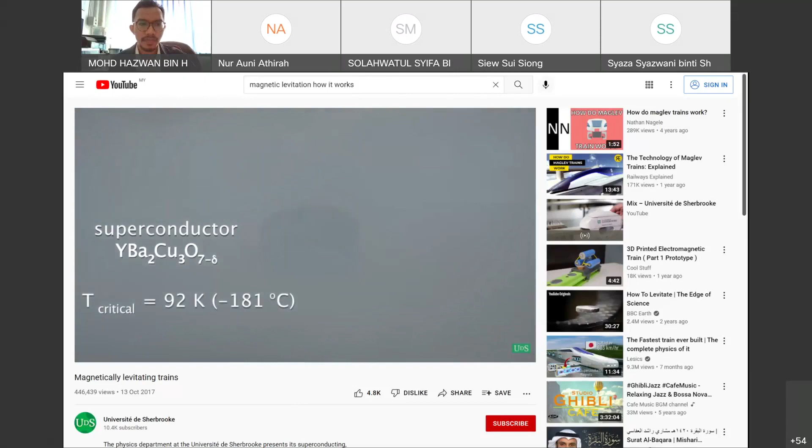Okay, so you can see that this is actually a miniature where you have a superconductor. This type 2 superconductor has been reduced to its critical temperature. So what happens is that when the material is reduced below the critical temperature, it starts to give a levitation effect.

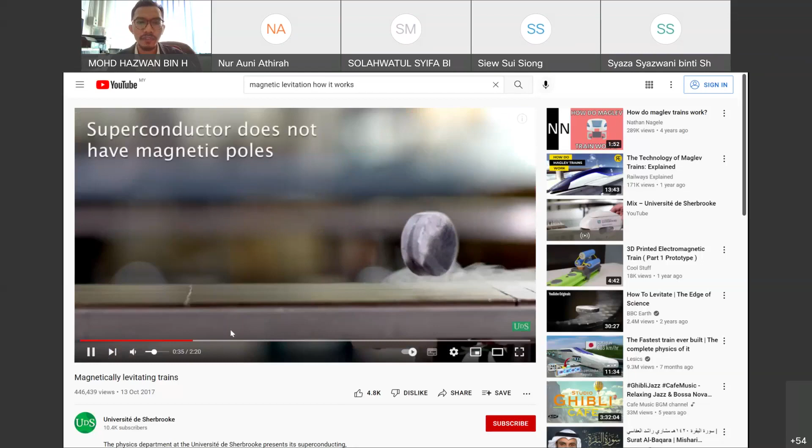And when you have a rail that is made from different poles, north, south, alternating, and with a simple push, you can see that the material can move, and the movement is like frictionless, and it actually gives a very high speed.

So imagine that you have a train and you put superconductors and reduce the temperature by adding liquid nitrogen. What happens is that with a simple push into the alternating magnetic pole line, the train can start to move with a high velocity.

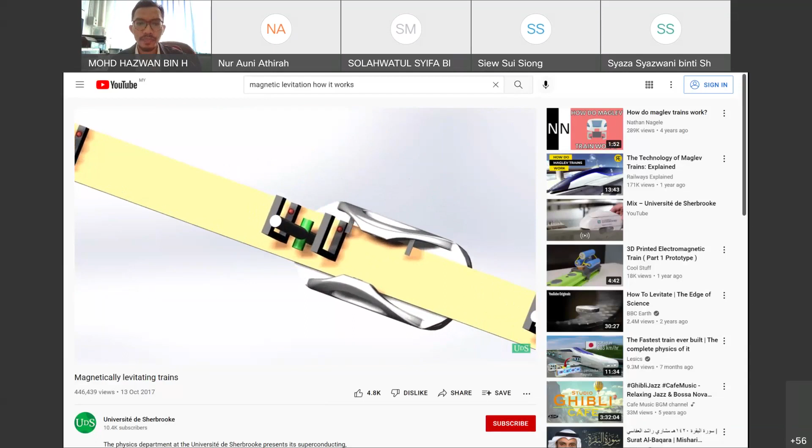Right, so all this technology has been used currently in various applications. I guess maybe you've seen speed trains in Japan, speed trains in China, in Europe, Taiwan, and so on. They are actually using magnetic levitation technology. And with this technology, we can ensure that the speed or velocity of the train could be achieved at a high limit.

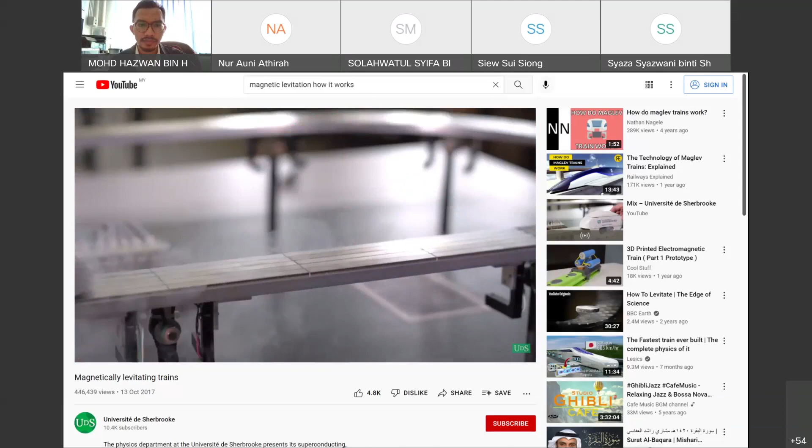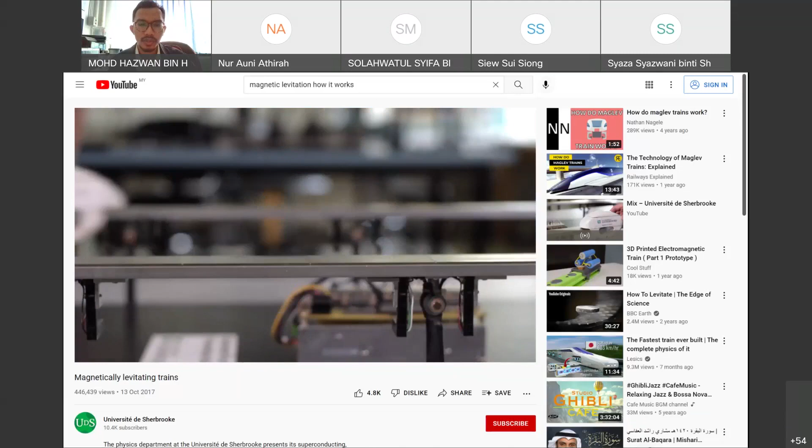So you can control also the velocity, and I think with this you can achieve as high a speed as you want.

All right, so that's all, I guess, for the video. I'm going to share slides for today. You guys find it interesting. I'm sure you will find it interesting when we talk about magnetic levitation. It's always, I guess, looking into the future of train transportation.

Okay, so the thing that you have seen just now is basically a material called superconductors. Superconductivity is actually the disappearance of electrical resistance below a certain temperature. So what happened is that you might see in the video that the researchers are putting liquid nitrogen. The function of the liquid nitrogen is actually to reduce the temperature of the superconductors so that it can achieve a so-called critical temperature.

So critical temperature is actually the temperature below which superconductivity is attained. And what happens is that when you reduce the temperature, the electrical resistance will disappear. So it means that you don't have any friction or any sort of resistance created as in a normal case.

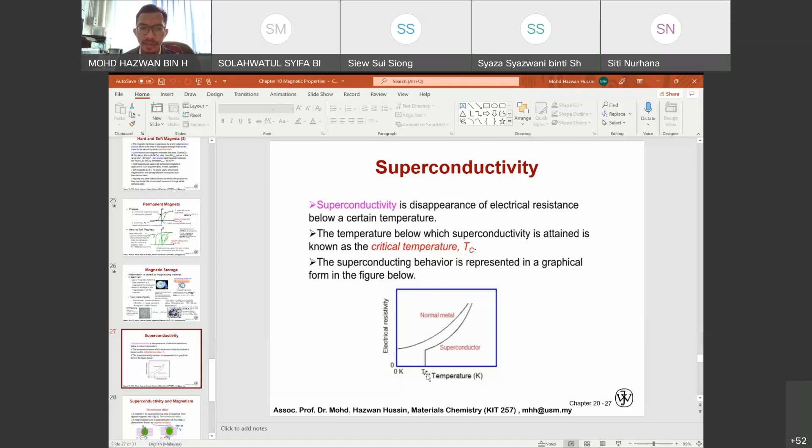So superconducting behavior is represented in the graphical form as below. You can see that as you increase the temperature for a normal metal, the electrical resistivity will increase exponentially. But for superconductors, what happens is that when you increase the temperature up to a limit of the critical temperature, there's no effect on resistivity. So it's going to stay flat, or the same, in the end.

Superconductivity and magnetism. The first one we can relate is the Meissner effect. A material in its superconducting state will expel all of an applied magnetic field. This is called the Meissner effect.

A magnet placed over a superconductor will give a flotation phenomenon known as magnetic levitation. In figure A, if the temperature is higher than the critical temperature, it will be in a normal conducting state and magnetic flux will penetrate. When you put a superconductor with a magnet underneath, you will see an interaction, an attraction.

But when you decrease the temperature of the superconductor by pouring liquid nitrogen, for example, the effect is that the critical temperature is now larger than the normal temperature. Then when you put the magnet underneath it, the superconductor will start to float. It will expel the magnetic field.

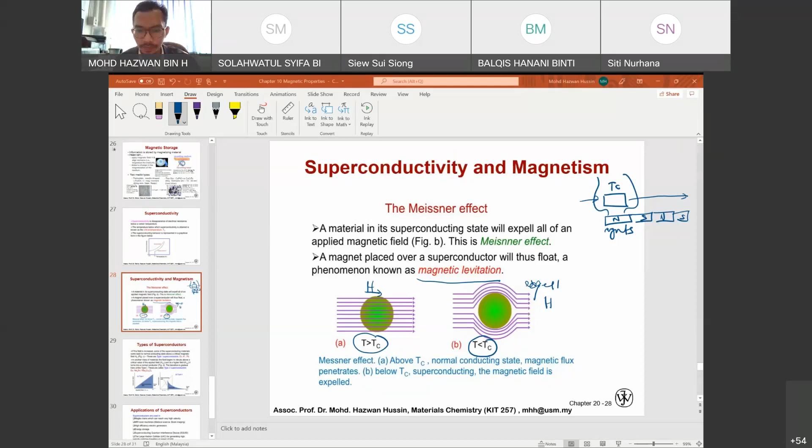Okay, moving on to the next one, we are looking at the different types of superconductors. There are different types of superconductors. For example, here I give examples of type 1 and type 2 superconductors.

Type 1 superconductor means that if the field is increased, some of the superconducting materials come back to a normal conducting state above the critical magnetic field. For type 2, in another class of materials, the field begins to intrude above a critical value of an applied field at the higher field. It turns into a normal conductor, and the transition is gradual, unlike in type 1. This is called superconductor type 2.

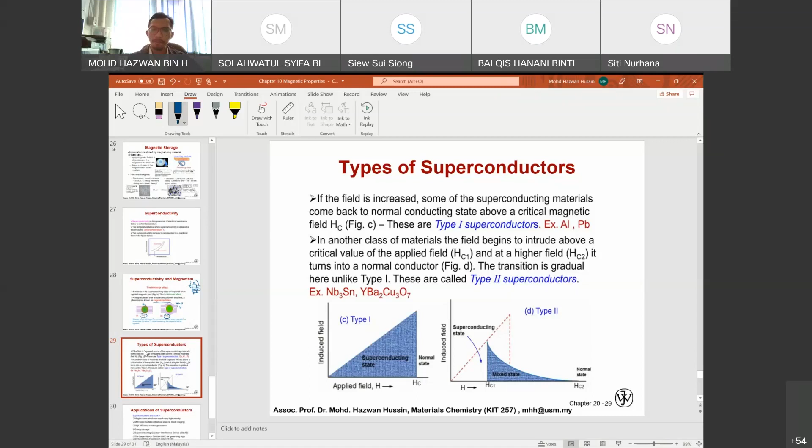Then you will use different types of superconductors. The application of superconductors can be seen in maglev trains, where the train will levitate and can actually move at high velocity.

Apart from that, there are also different types of devices that use superconductors. For example, MRI, magnetic resonance imaging scan, is used to scan your internal organs, and it can give doctors a diagnosis of what kinds of disease you have.

There's also another application with regards to energy storage or electrical generators, high efficient electric generators, and energy storage. Apart from that, superconductors are also used for SQUID.

Don't be confused with Squid Game. I'm sure you are watching Squid Game, but SQUID actually refers to superconducting quantum interference device. This is a quantum interference device, normally used in high-end electrical or AI technology.

Finally, superconductors are also used in colliders, like the large hadron collider. I think the term collider is something alien to you guys, but in some countries they are studying the effect of colliders, because a collider can produce a massive amount of energy. For those who didn't understand what a collider means: you have a tube that is in vacuum.

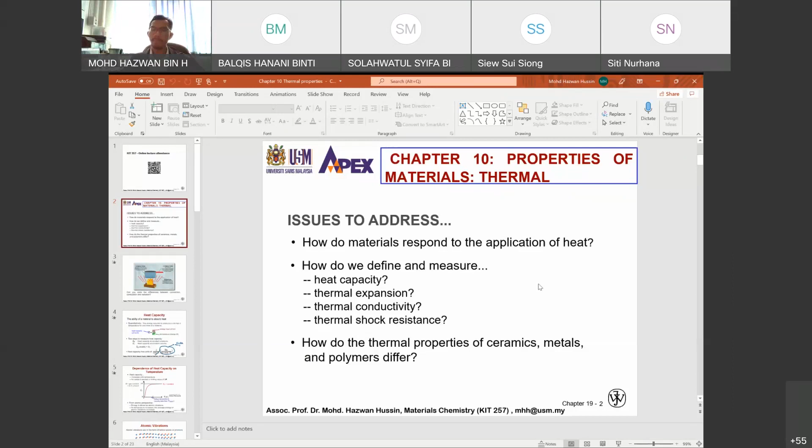Before we go into the basic definitions, probably we need to understand what modes of heat transfer you can actually observe.

Imagine that you have a metal pot - you are doing some camping, and you put it on fire, and inside this pot you put water because you want to boil it. So when you hold the pot, what happens is that you will feel the heat after a certain time. Initially maybe you didn't feel it, but after a few minutes you will start to feel hot on your palm.

So what is actually happening is that the heat from the source, which is from the fire, is transferred into the pot and finally goes into the surface of your hand. This mode of heat transfer is known as conduction. Conduction is the transfer of heat or electrical current from one substance to another by direct contact. While holding the pot, your body will start to feel hot as well.

It is not because of the effect of holding the pot. Could be partly, but I think the other is actually coming from the radiation. Okay, the heat coming from the fire itself. So this is actually called radiation. So radiation is the energy that is radiated or transmitted in the form of rays or waves or particles.

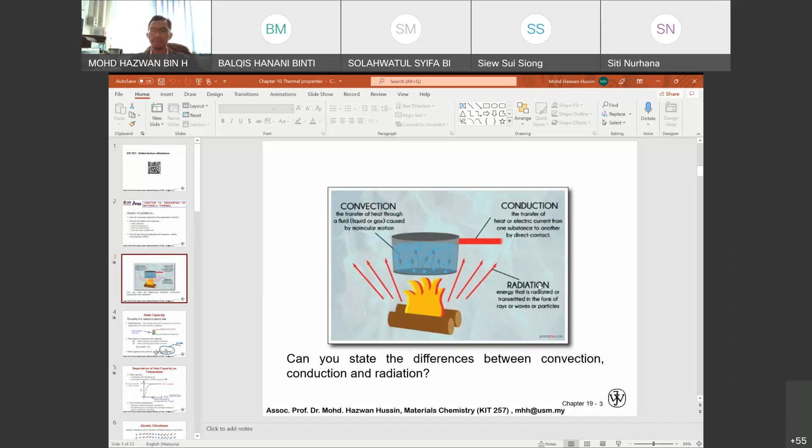Okay, right. So heat capacity. So this is also not something alien to you guys. You've heard about heat capacity during high school, during your matriculation, during your STPM, A levels, in KFT as well. Okay. So heat capacity, maybe in your mind, you start to think about CP, but you have to understand that heat capacity also has other terms like CV with regards to constant volume and whatsoever.

So heat capacity is actually the ability of a material to absorb heat. Quantitatively, the energy required to produce a unit rise in temperature for 1 mole of a material. Okay. Therefore, if you want to calculate heat capacity, it is always the energy input Q over delta T, change of temperature. There's two ways to measure heat capacity, which is first, it's known as CP, heat capacity at constant pressure.

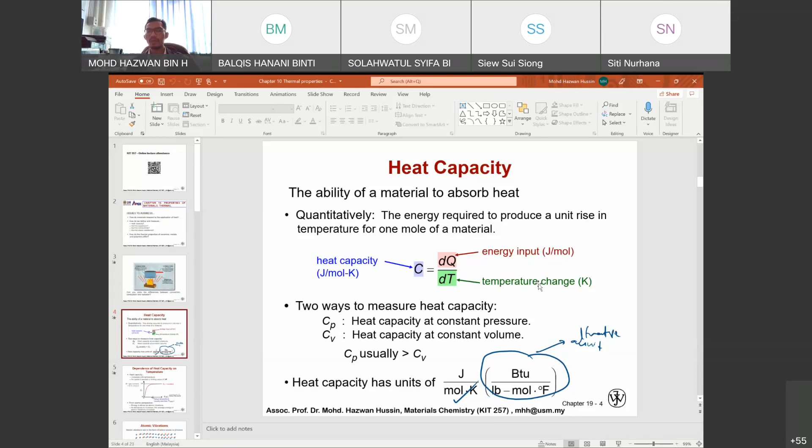This is the common phenomenon that you see a lot. And then you have CV, heat capacity at constant volume. Okay, this indicates that you are studying different pressure effects and whatsoever. So usually CP is larger than CV. And the unit of heat capacity is always related with energy, because energy is actually in joule. So you have to use joule per mole per Kelvin unit for heat capacity.

All right, so the dependence of heat capacity on temperature. So heat capacity will increase with temperature. As you increase the temperature, your CP or CV will increase as well. For solids, it will reach a limiting value of 3R. R is actually the gas constant. At 3 times the gas constant value, your heat capacity will be flat, or constant in this case, right? So from an atomic perspective, energy is actually stored as atomic vibration, and as the temperature increases, the average energy of atomic vibration will start to increase as well.

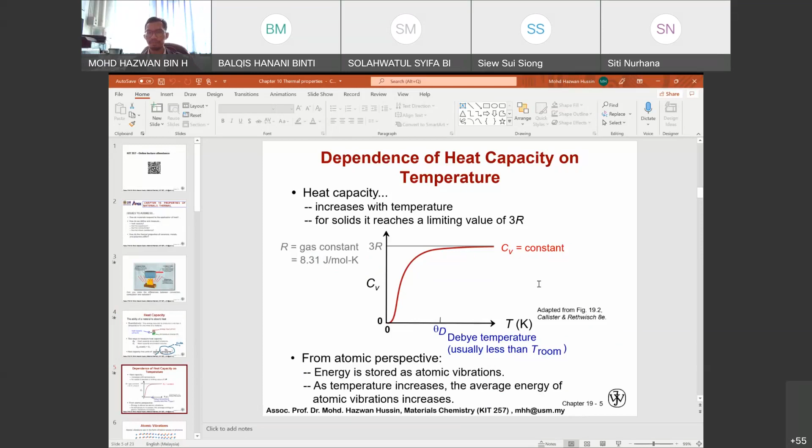Okay, so we talk about atomic vibrations when a material has been heated up. So atomic vibrations are in the form of lattice waves, or so-called phonons. So when you have a material that is not being heated up, the lattice position is actually fixed. But when you heat it up, the material starts to become disturbed and starts to vibrate, and it is not actually at the normal position. It has been displaced because of vibration. So this is actually what we call phonons or atomic vibration.

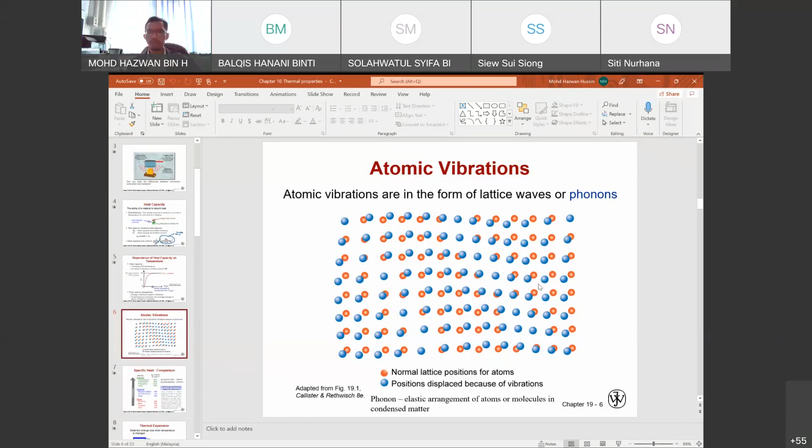I saw the name Han. Han only. Siapa Han? Han, are you there? No, Han is not there. Okay. Mardiana Zubir. Mardiana ada there?

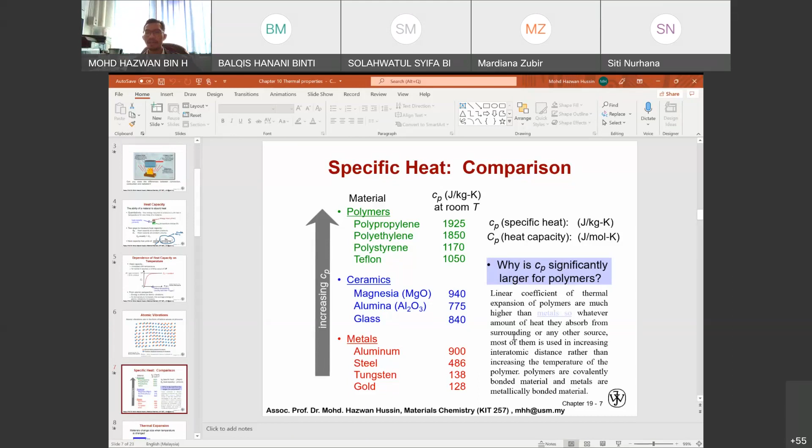Next, we move on to thermal expansion. Have you noticed the experiment in high school or primary school where you put a rod over a candle, and the length of the rod slightly increases? What causes this, or why during daytime do the electrical cables become stressed or slightly stiff compared to nighttime? All these relate to thermal expansion.

Thermal expansion is defined as the change in size of a material when temperature changes. You have an initial lower temperature, and when you increase the temperature, the material tends to elongate. But the elongation is not tremendous, not from 1 centimeter to 1 meter when you put fire. It would be a slight displacement, maybe from 1 centimeter to 1.01 when heated.

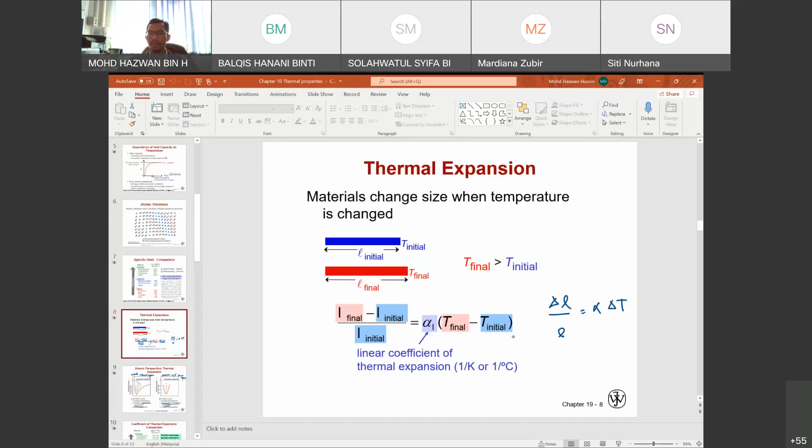A comparison between different materials. From the thermal expansion perspective, you have an asymmetric curve and a symmetric curve. Some materials give thermal expansion when heated, but some don't. For the asymmetric curve, as you increase the temperature, interatomic separation increases, resulting in thermal expansion. For example, metals: when they start to vibrate, there is interatomic separation, and they experience thermal expansion.

But say you heat up minerals or ceramics. There's an increase in temperature but no interatomic separation, which results in no thermal expansion. If you heat ceramics, you don't see them elongate; they just remain as they are. That is why ceramics or minerals are normally used as thermal insulators, because they absorb heat without changing the structure of the material. This is called the symmetrical curve for thermal expansion.

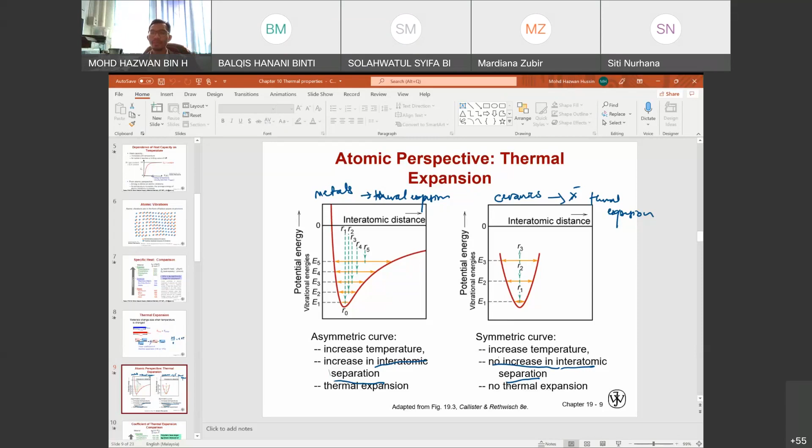Right. So a comparison of thermal expansion between different materials, again in relation to the linear coefficient. Polymers have a high thermal expansion because they have a higher linear coefficient as compared to metals and also ceramics. So ceramics, as I said, will have the least thermal expansion as compared to metal. Metal will have a thermal expansion.

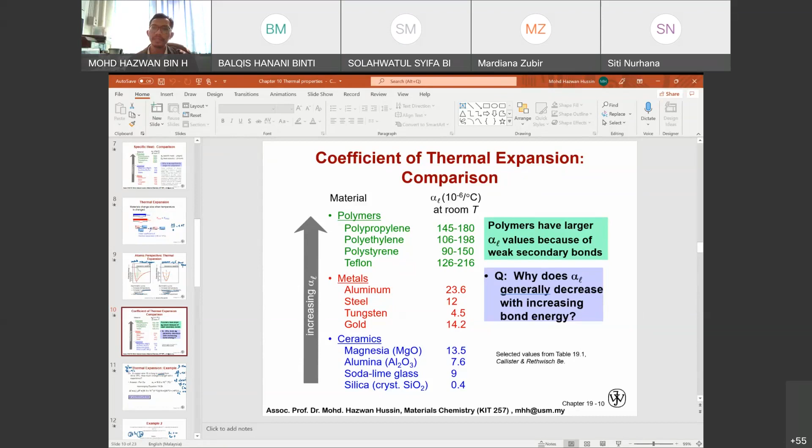So why does alpha generally decrease with increasing bond energy? This is because materials that have a larger alpha value will have weaker types of bonding, and that will actually cause an increase in thermal expansion. Okay. All right. So let's look at the examples.

I'm sorry, you might see all these writings on this. The writing is actually from yesterday during the pre-recording.

For example, you have one copper wire 15 meters long that is cooled from 40 to -9. How much change in length will it experience? So over here, we know that you have a copper wire with an initial length of 15 meters. And then there are two temperature values given, 40 and -9.

So what do you think? Which one will be the initial temperature and final temperature? It's mentioned over here that it is cooled. So the initial temperature is 40 and the final temperature is -9. But thermal expansion means that from a colder temperature, it's heated up and it will elongate. So if we want to put this into a thermal expansion phenomenon, you should put -9 as your initial temperature, and your final temperature will be 40, because in thermal expansion you heat and there's an increase of temperature.

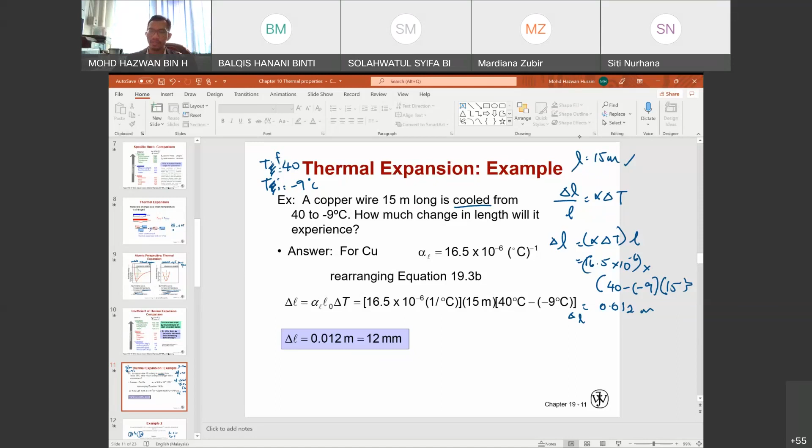So alpha is 16.5 times 10 to the power of minus 6, multiplied by the change of temperature, 40 minus minus 9, then multiplied by the length, which is 15, and in the end you will get 0.012 meters change. Quite simple. Let's look at another example.

You have a circular hole with a diameter of 2 centimeters made in an aluminum plate at 0 degrees. What will be the diameter at 100 degrees? Given that the alpha value for aluminium is 2.3 times 10 to the power of minus 3. So here we also use the same formula. It's just that the case is given in diameter, but we can still assume that the diameter is equal to the length because it's like a cylindrical hole, not a three-dimensional shape.

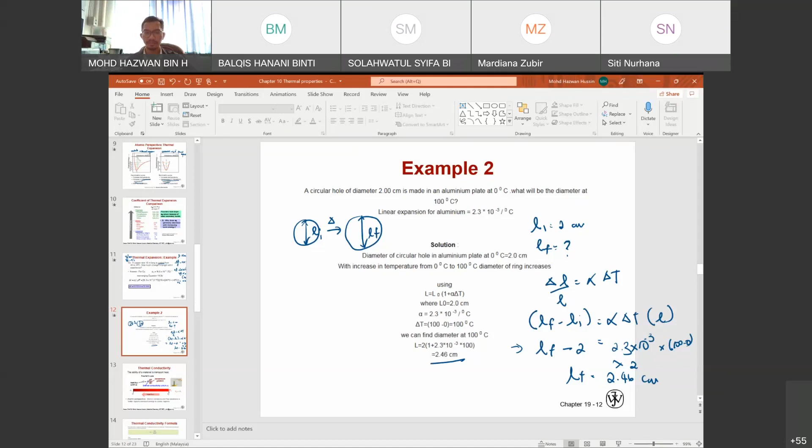So we are going to find the final length. The initial length is 2 centimeters, the initial temperature is 0, the final temperature is 100, and alpha is 2.3. So you can put it into the formula, and in the end you will get the final length equal to 2.46 centimeters. So this is also quite a straightforward example.

Okay, so we are moving on to the next one, which is thermal conductivity. The ability of a material to transport heat is known as thermal conductivity. So here we are considering Fourier's law: Q is equal to minus K multiplied by the change of temperature over the change of X. The change of X is the change of distance.

And from the atomic perspective, atomic vibrations and free electrons in hotter regions transport energy to a colder region. So if you have a rod over here and a heat source, after a certain time, your hand starts to feel the heat, and this is caused by thermal conductivity. And by deriving Fourier's law, you can calculate thermal conductivity using this formula.

K is equal to Q multiplied by L over A multiplied by delta T, where K is the thermal conductivity in watts per meter Kelvin, Q is the heat transfer through the material, normally in joules per second, A is the area in square meters, and delta T is the difference in temperature. So what is L? L is the distance.

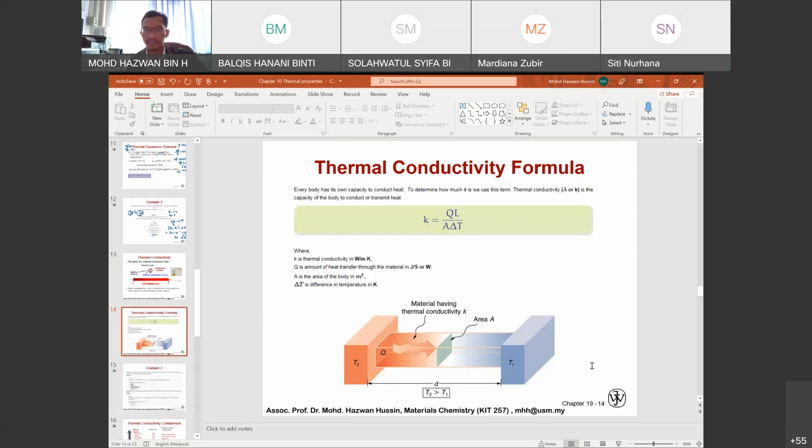So example, calculate the thermal conductivity through a conductor when 30 kilowatts of heat flow through it, having a length of 4 meters and the area of 12 meters square, if the temperature gradient is 40 Kelvin. So from here, you can actually use the formula K. So Q value is equal to 30 kilowatts. Length is 4 meters, 30 times 4.

Okay. And then over area 12 multiplied by 40. And you have to remember that the heat flow value given over there is in kilowatts, so you have to multiply by 10 power of 3. And finally, you will get the thermal conductivity value, which is equal to 250 watts per meter Kelvin.

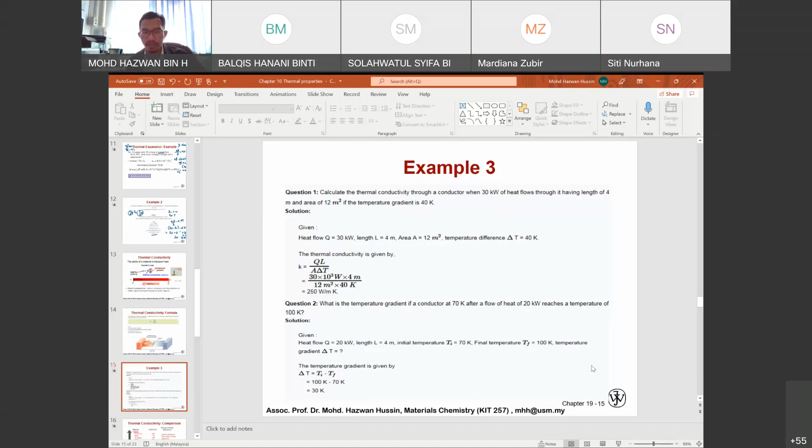So question 2, what is the temperature gradient if the conductor at 70 Kelvin, after a flow of heat of 20 kilowatts, reaches a temperature of 100 Kelvin? So here you just want to find the temperature gradient. In order to find the temperature gradient, it is very simple. You just subtract the initial temperature from the final temperature. So 100 minus 70, you will get 30 Kelvin.

So thermal conductivity in comparison: of course, metals will have higher thermal conductivity values because of the atomic vibration and motion of free electrons, as compared to others. Polymers will have the least thermal conductivity. Ceramics will have moderate thermal conductivity values. All these depend on the ability of the material to absorb heat, then vibrate, and then give a motion.

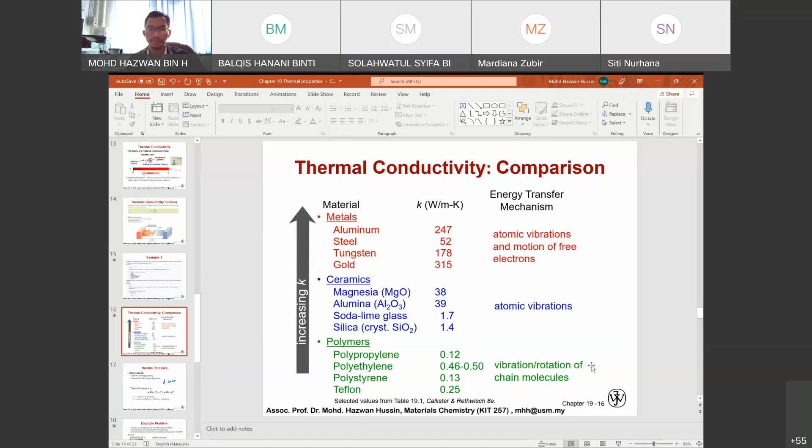I think before we end, there are a few points on thermal stress. We have looked into thermal expansion and thermal conductivity. So now it's on thermal stress. Thermal stress is actually a combination between thermal effect and mechanical effect. It occurs due to uneven heating or cooling and mismatch in thermal expansion.

So imagine you have a piece of glass and you pour hot or boiling water inside it, and when you remove the boiling water, the glass is still hot, and immediately you put it in an ice bath. What happens is that you will see it crack, or maybe it breaks. This is caused by so-called thermal stress. There's also a mismatch in thermal expansion, and then the stress effect can occur.

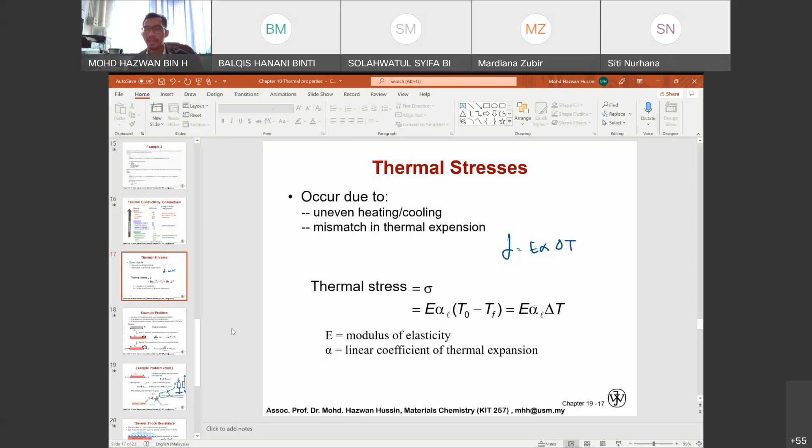So thermal stress can be calculated. Stress is still sigma. So sigma is equal to E, the modulus of elasticity, multiplied by the linear coefficient and multiplied by the change of temperature. Example: a brass rod is stress-free at room temperature. It is heated up but prevented from lengthening. At what temperature does the compressive stress reach 172 megapascal?

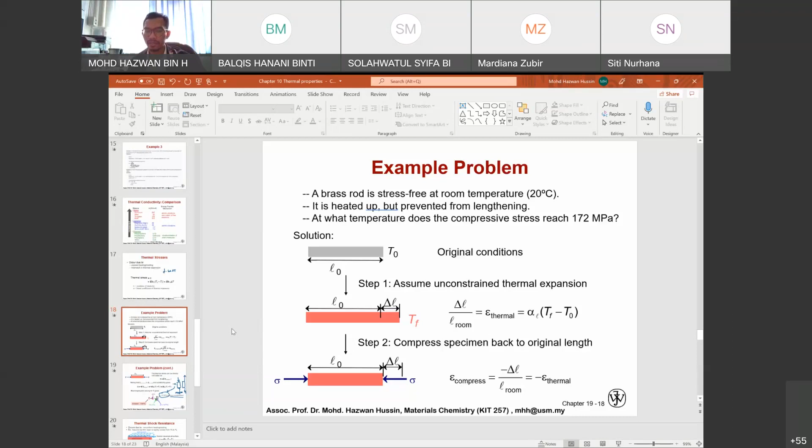So in the original condition, the material has an initial temperature and initial length. Assuming unconstrained thermal expansion, you'll see some displacement or change of length. Then with compression of the specimen, from the expansion it starts to compress, returning back to the original length. So the thermal stress can be calculated directly from this formula.

So rearranging and solving for T final will give the value, because here they are asking what will be the final temperature. So you put the initial temperature 20, sigma value minus 172 megapascal over E. E is the modulus of elasticity for brass, which is 100 gigapascal at this temperature. And the linear coefficient is equal to 20 times 10 power of minus 6.

So always remember that whenever you have compression, the stress value that you put is always negative, because it is not like tensile. In tensile, you pull the material, so it will be positive, but compression will shorten the length. That is why the stress value that you put in the formula must have a negative sign.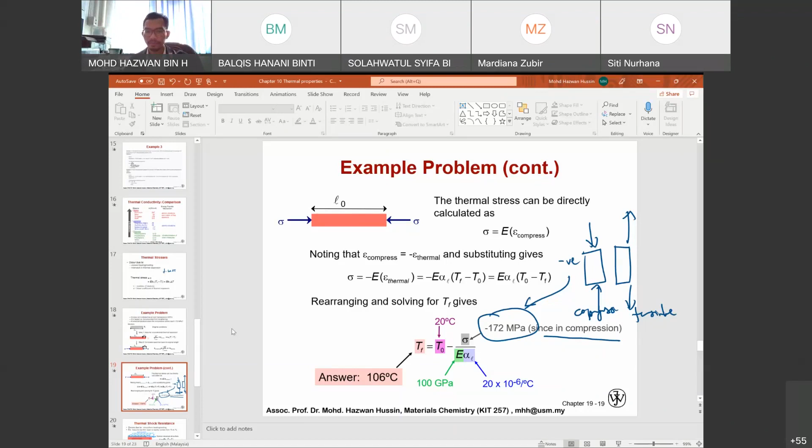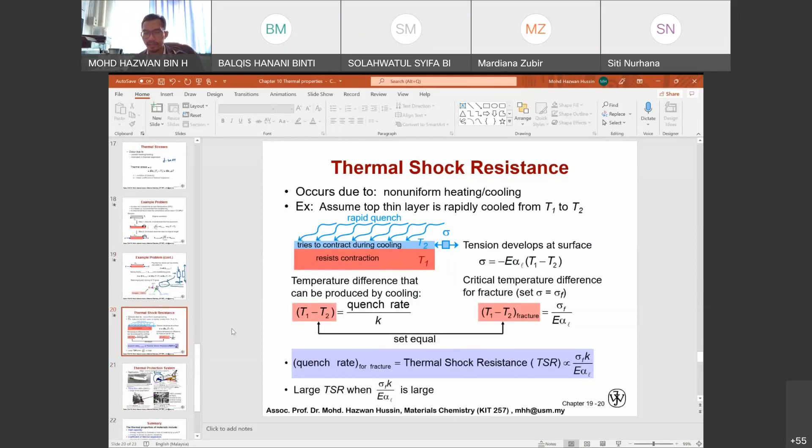And lastly, we have the so-called thermal shock resistance. Thermal shock occurs due to non-uniform heating and also cooling. It's similar to thermal stress, but in this case, we assume that the top layer is rapidly cooled from temperature 1 to temperature 2. This creates a so-called quenching effect, where in the end it will create cracks and damage the material.

One example you can see is the thermal protection system in the Space Shuttle Orbiter. After the mission has ended, the astronauts go back to Earth using the shuttle orbiter. When it enters the atmosphere, gravity is applied, so the amount of friction and force applied to the orbiter is huge. If the body of the orbiter is not protected with a highly resistive material, friction can cause heat, heat can cause fire, fire can cause explosion.

That is why the space shuttle orbiter is equipped with a thermal protection system. For example, the fuselage is the region where the astronauts or the pilot stay, and at this point you have more force or more friction. So it is equipped with reinforced carbon-carbon, which is highly resistive, up to about 1600.

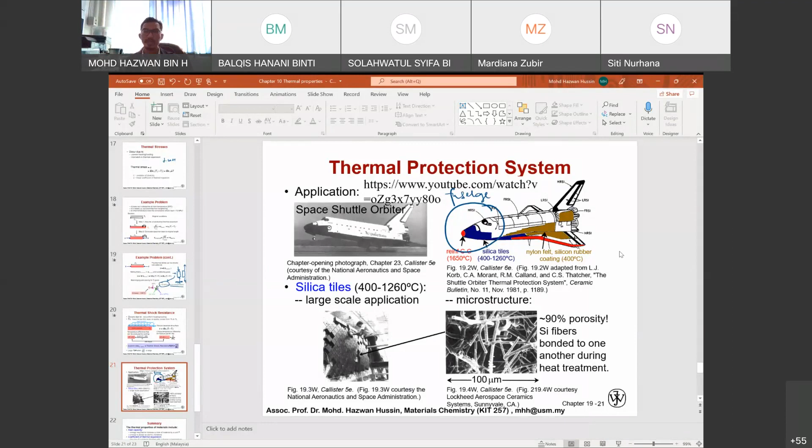So this was a very catastrophic incident. All astronauts were declared dead, and later they found out that during the launch of the rocket, one piece of the material had been dislocated. It had been displaced, and they didn't realize it and didn't fix it. When they came back to Earth, the orbiter just burned, killing all the astronauts. You can check this incident on YouTube. It was a sad day for NASA.

So as a summary for this chapter, we have looked into the definitions of heat capacity, linear coefficient of thermal expansion, thermal conductivity, and thermal shock resistance. What is important for this chapter is that you know how to calculate thermal expansion, the difference in length and temperature in different situations, how to calculate thermal conductivity, and maybe give some examples of thermal shock resistant materials. This is the essence of this topic.

So that marks the end of our thermal properties chapter. On Friday we are going to have optical properties, the last one on material properties, before we start the last chapter, chapter 11, on corrosion and degradation of materials.